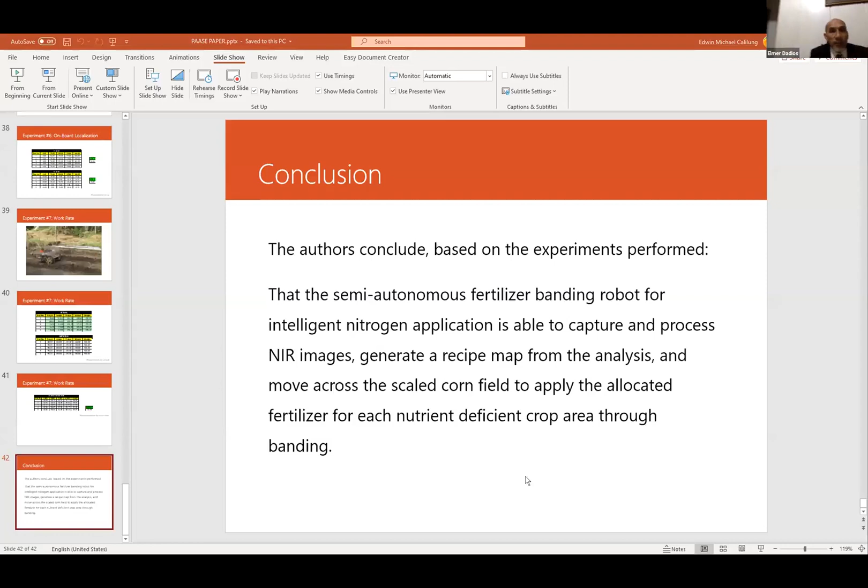Our next presenter is Dr. Ryan Rhay P. Vicerra. He's also the Vice Chair of the Manufacturing Engineering Department of the De La Salle University and a full professor of the Department of Manufacturing Engineering also, De La Salle University. He was the 2019 outstanding scientist, and in 2017 he was awarded also as the IEEE Asia and Pacific Outstanding Volunteer.

He's a professional electronics engineer, and he's very known on research. He published more than 85 Scopus Index papers. His expertise includes artificial intelligence, robotics, swarm intelligence, biomedical devices, control systems, electronic circuit design, and many. Ladies and gentlemen, I'm proud to present to you Dr. Ryan Rhay Vicerra. Rhay?

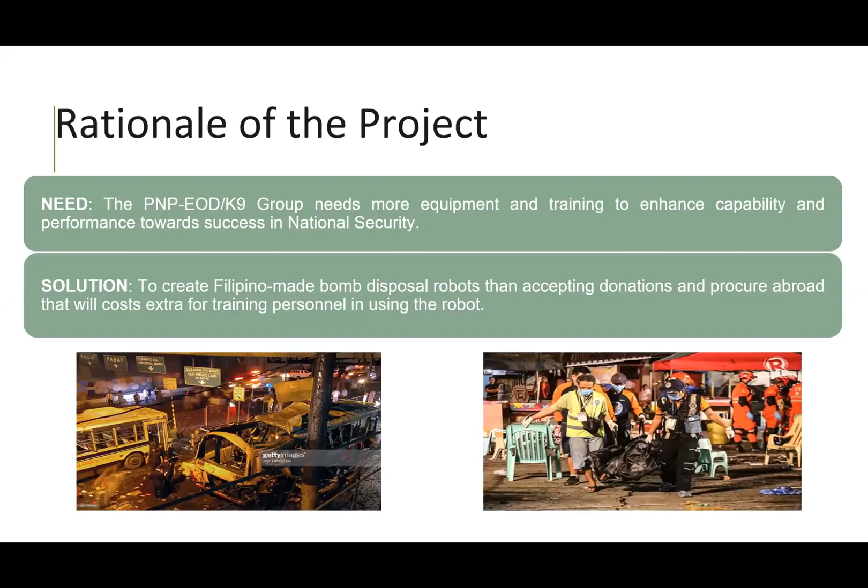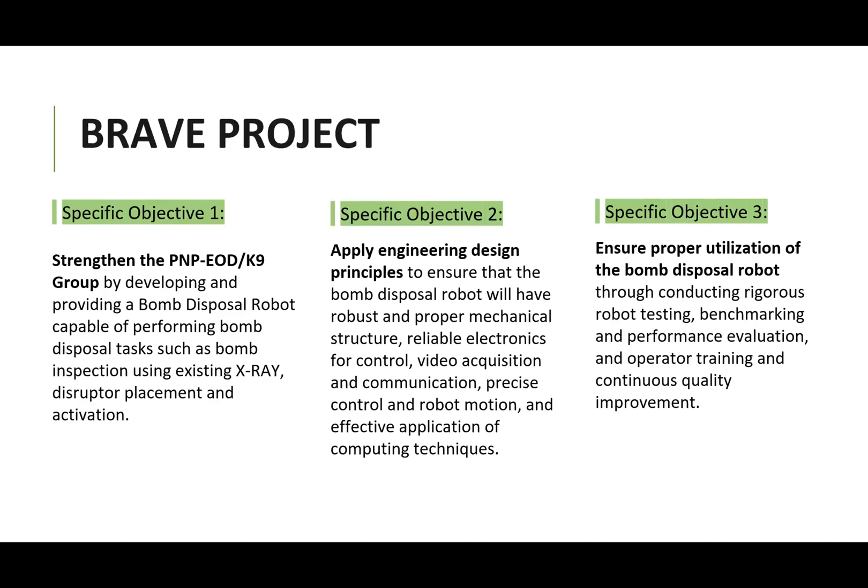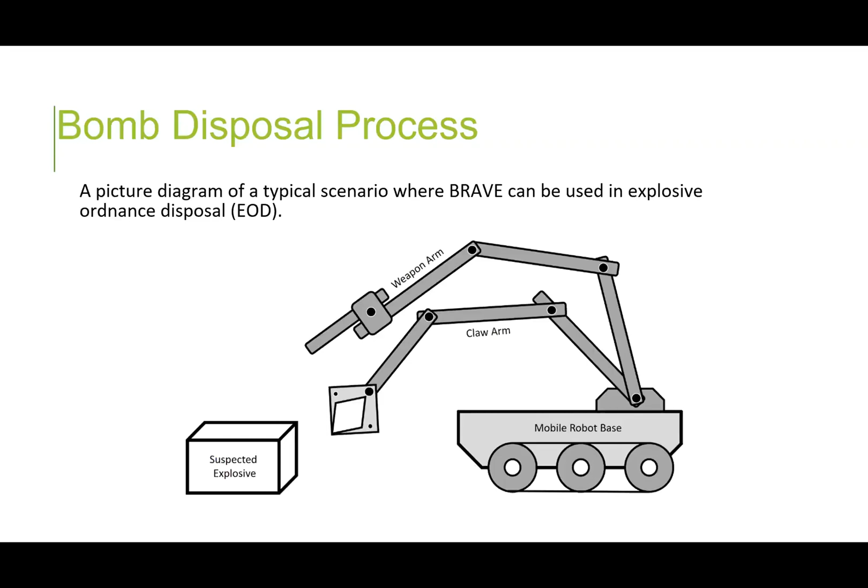So the bomb disposal process actually starts this way. Here's a picture of a typical scenario wherein the BRAVE or the bomb disposal robot will approach a suspected EOD or an explosive ordnance device. Of course, we still don't know what's inside, so it is still a suspected EOD. And in the presence of a suspected EOD, a human agent may be at risk if he or she will approach it. So the BRAVE will be the one who's going to approach and perform the EOD process as follows.

The first one is to inspect using a mobile X-ray unit. And then second is to identify if the explosive qualifies for water bomb disruption. Because there are some types of bomb that are not qualified for disruption, so another method must be performed.

So if it qualifies, then it will carefully place the water disruptor near the box or the suspected EOD. Then Brave will detonate the water bomb disruptor, making the suspected explosive device soaking wet so it will not detonate anymore. If a water disruptor is not enough, a high pressure water cannon may be used.

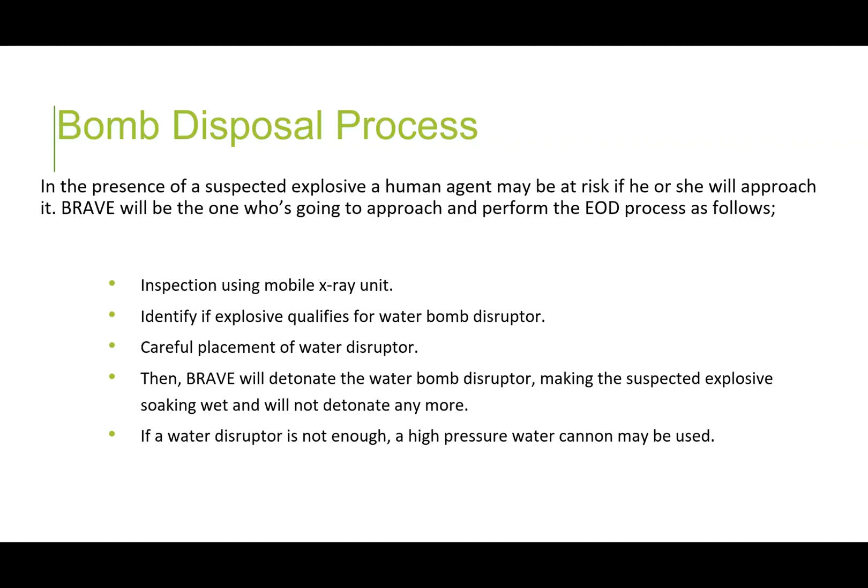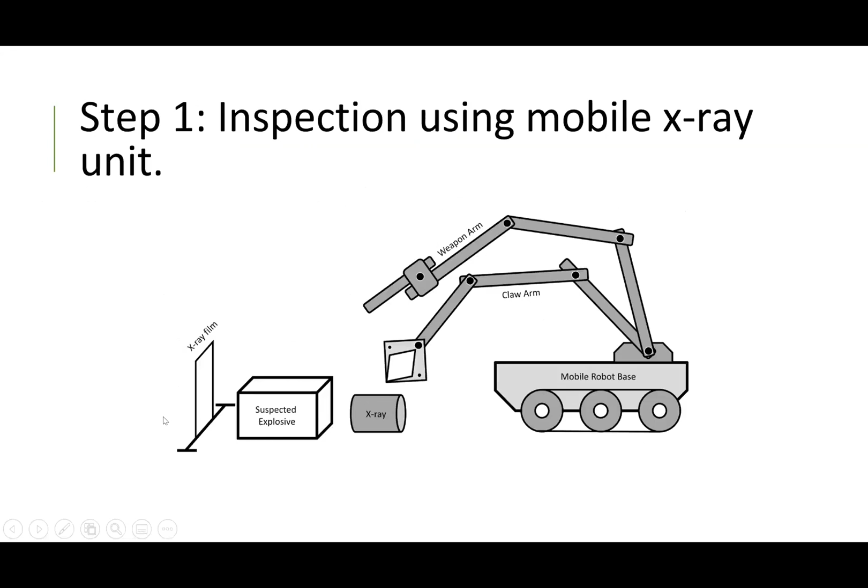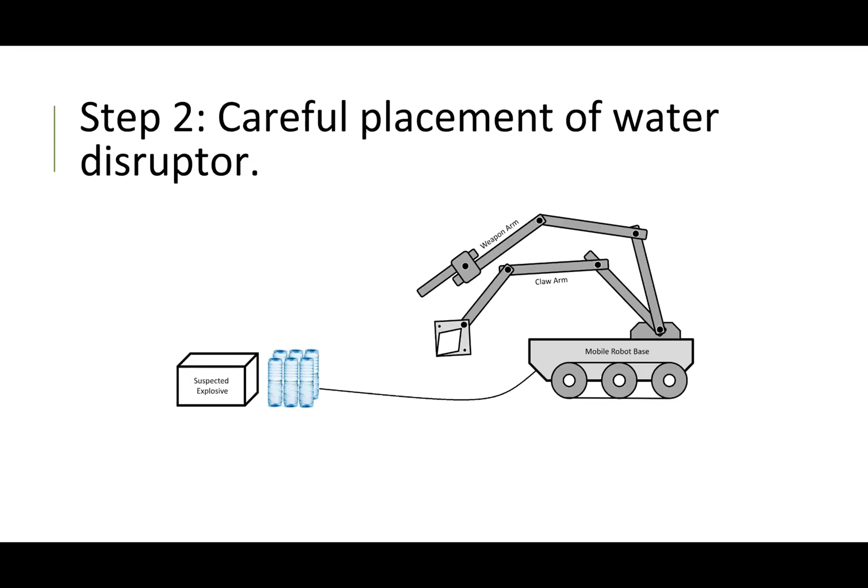So to illustrate this process, let me show you again a very simple illustration. The X-ray system is composed of the X-ray emitter and the X-ray film. This will be positioned by the Brave robot. After that, if it qualifies for bomb disruption, a bomb disruption module will be placed near the suspected explosive, and there's a tether connecting the robot and the disruptor. Remotely, it will disrupt the suspected EOD.

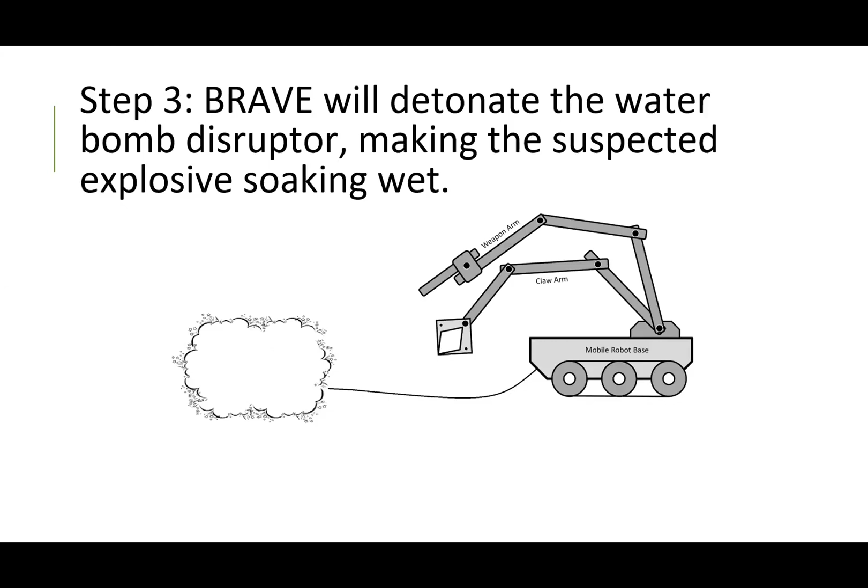This way, all the electronics and everything inside will be dismantled, and the bomb will no longer be operational. Okay, in the event that disruption is not possible, one way also is to use a high pressure water cannon. And that water cannon can be placed in one of the arms of the Brave robot.

As you can see in this illustration, the Brave robot is a mobile robot with two robotic arms. One we call the claw arm, obviously because it has a gripper as an end effector, and the weapon arm is an arm where we can connect the high-powered water cannon.

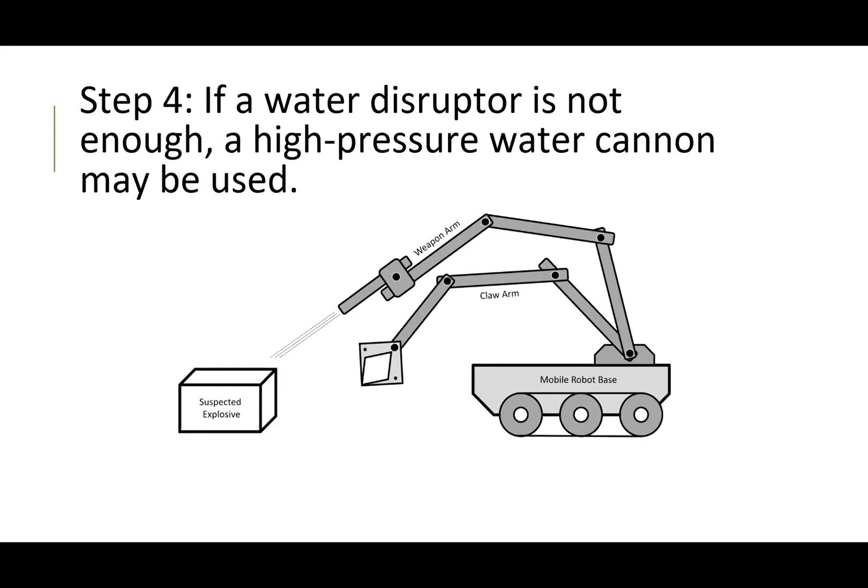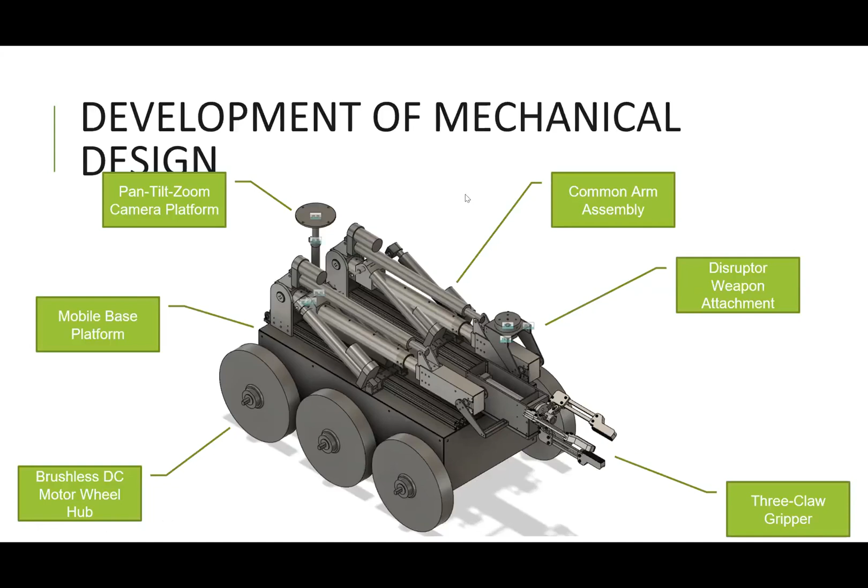For this design, what's illustrated here is a 3-claw gripper, the one that we presented in AUN, the one I mentioned a while ago, and I'll also be discussing a bit about that. Okay, so here's another rendered view of the Brave robot. And here's another version of it.

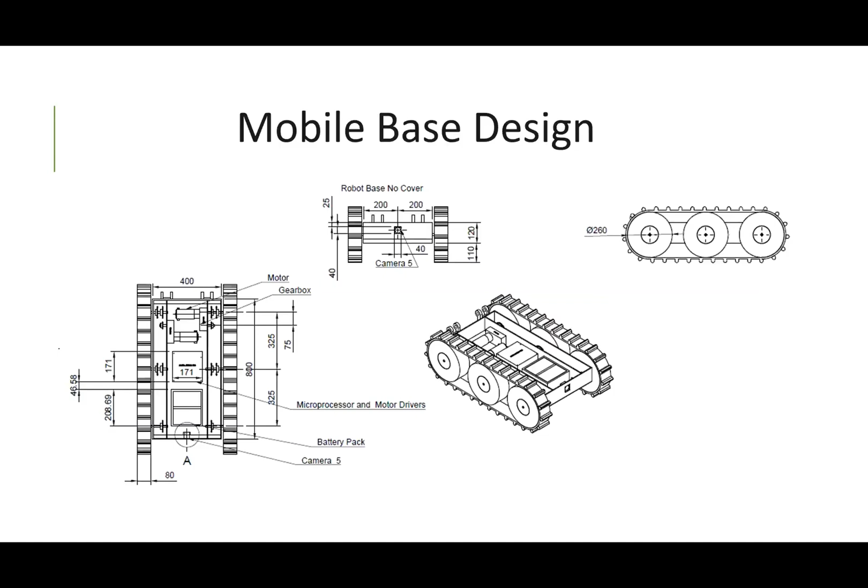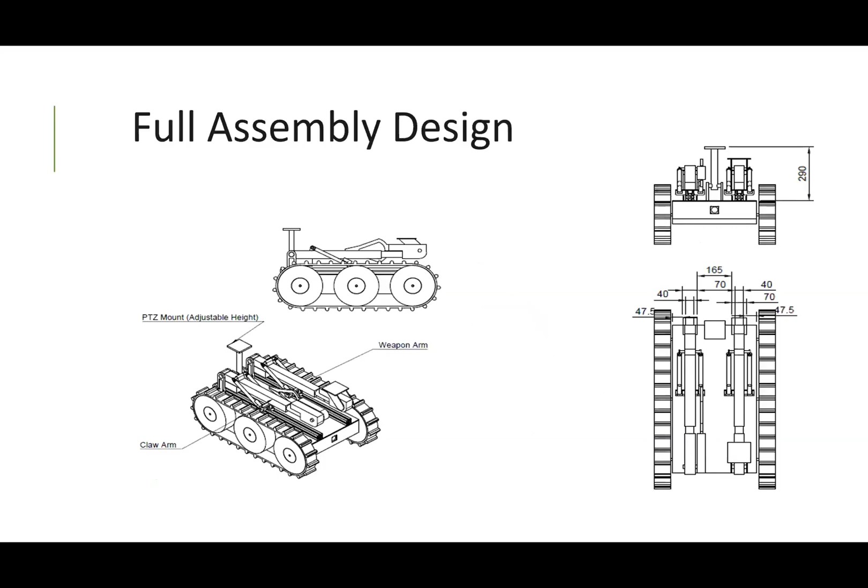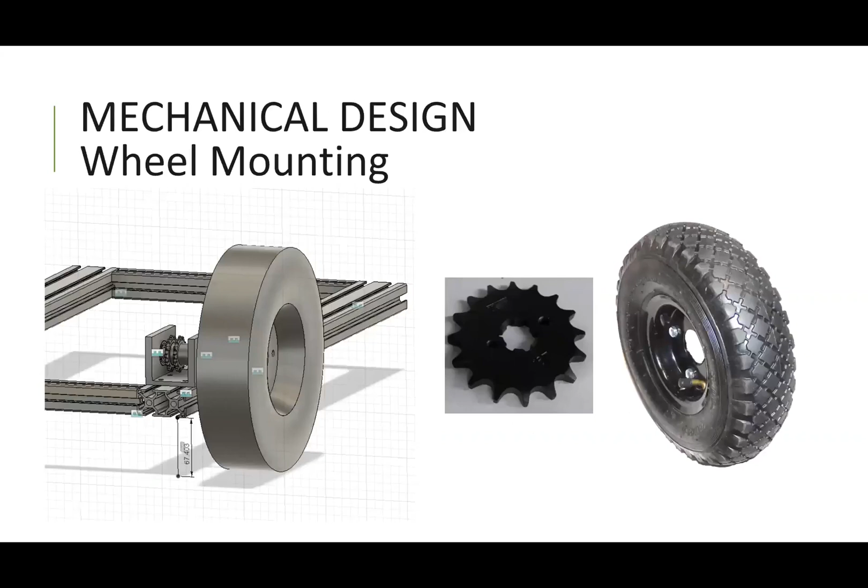So here are the specifications of the mechanical components of the mobile base. Again, I'll just be showing you some of the pictures of our Brave robot design. This is still one overview of the project. And here are the wheels. As for the motor, we use a brushless DC motor, similar to the one that we use in electric bikes.

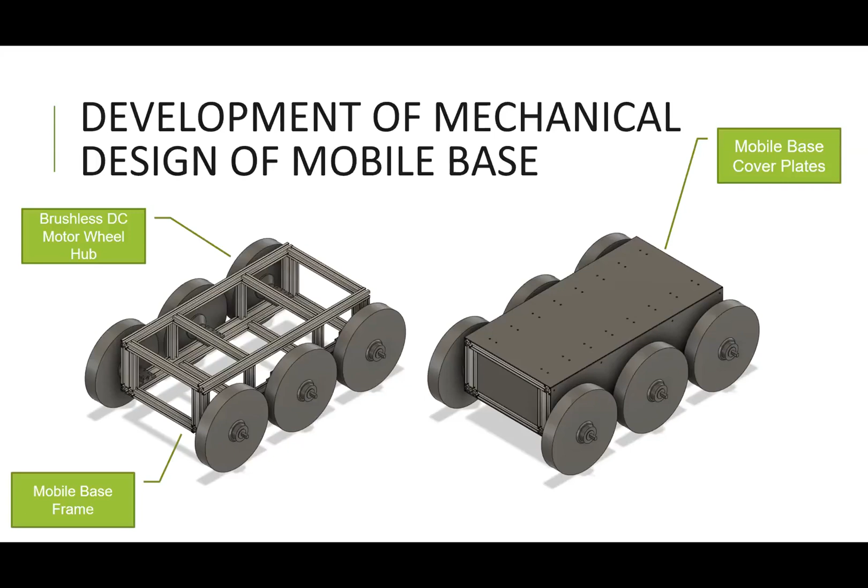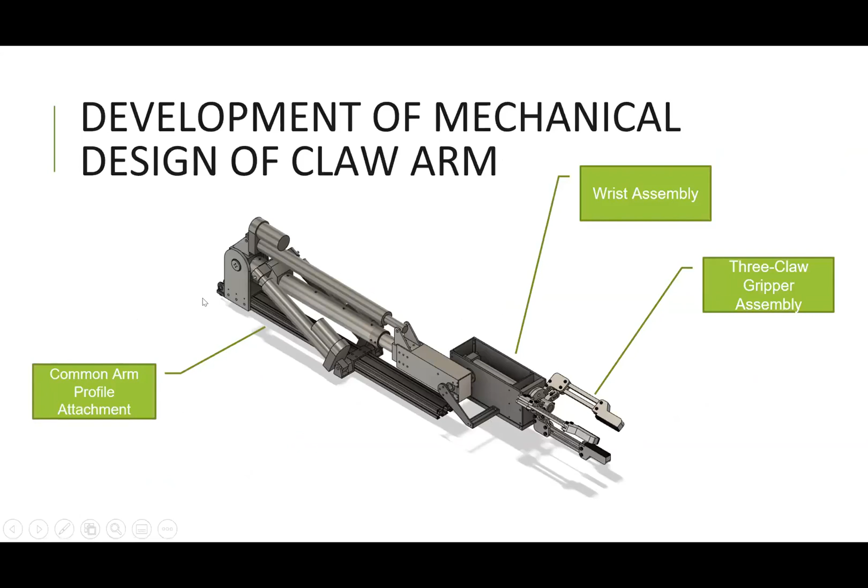Okay, and for the claw arm, we have the wrist assembly that will be connecting the claw arm to the whole assembly of the arm. And this is for the weapon arm. And this is the gripper that we developed that I shared with you a while ago.

This was actually in cooperation with some of our graduate students, namely Mr. Dino Ligutan, Mr. Jason Espanola, Richard Tanay, Dr. Argel Bandala, myself, and of course Elmer Dadios. The concept of this paper is to design a 3D-printed three-finger robotic gripper end effector.

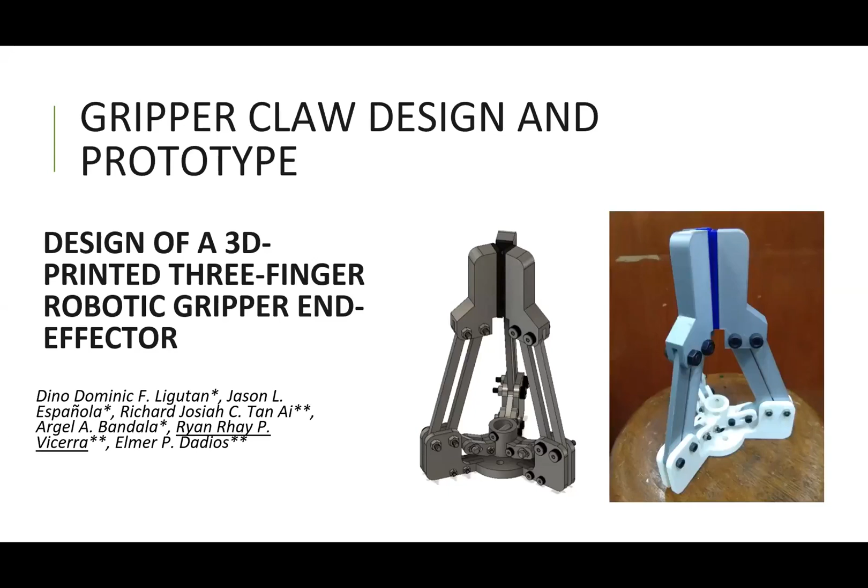So this is an illustration of it showing its dimensions, and these are the parts that we 3D printed, and we used Autodesk Fusion 360 for the CAD drawings and for designing the 3-finger gripper robot arm.

This 3-finger configuration is expected to improve gripping reliability and stability compared to a 2-finger design.

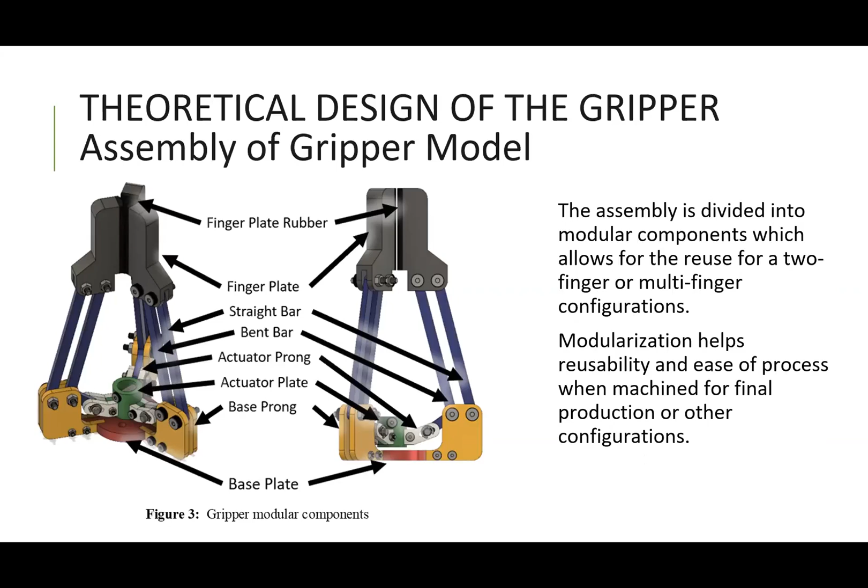The design is actuated by a linear actuator, with a dimension that allows at least a 30-centimeter opening. The assembly is divided into modular components, which allow reuse of the 2-finger or multi-finger configuration. We also applied modularization, which will help with reusability and ease of process when machining the final version of this design.

Here are some illustrations we shared during our presentation at that conference. At this point, I'd like to share the progress of our metalwork fabrication. By the end of this series of pictures, you'll see that the Brave project has already taken its mechanical form, or mechanical frame.

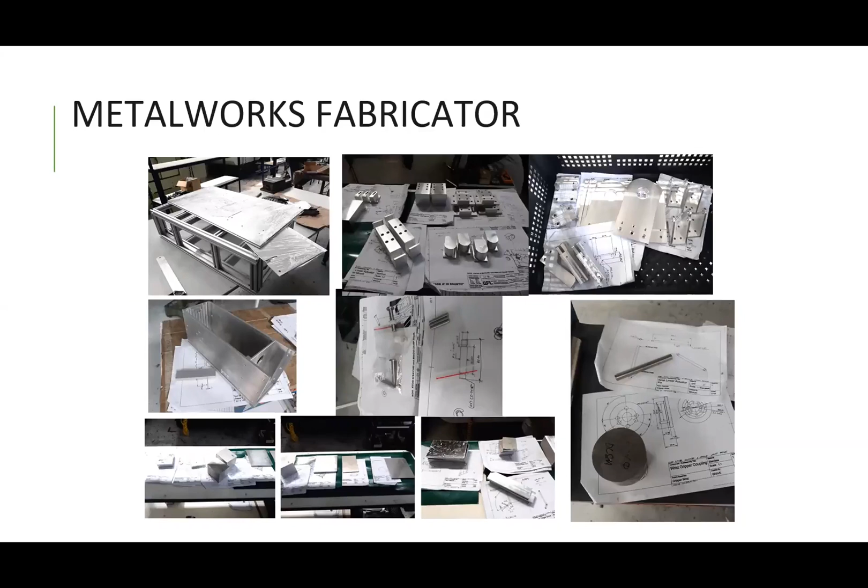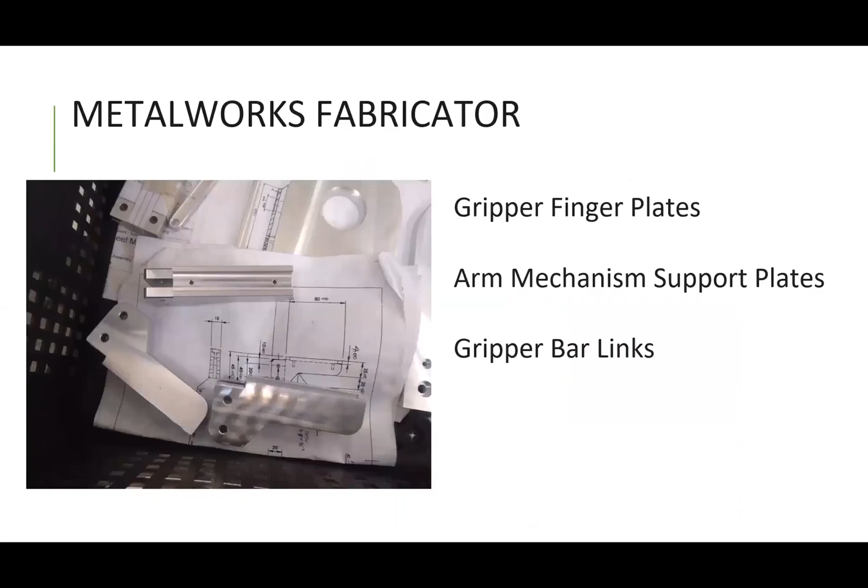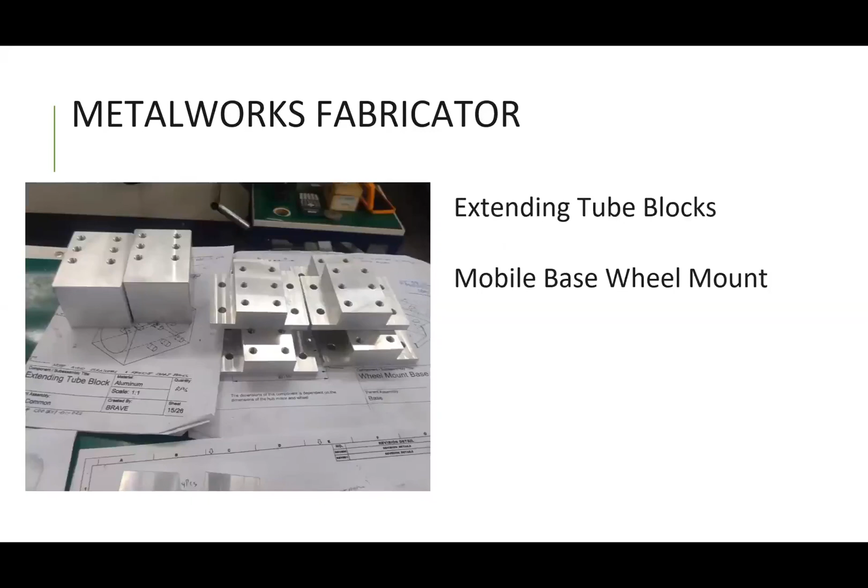This is the mobile aluminum frame, and these are the gripper finger plates, arm mechanism support plates, and gripper bar links. We also have these bushings, linear actuator caps, extending tube blocks, mobile base wheel mount, and this joint for the linear actuator attachment to the aluminum profile base.

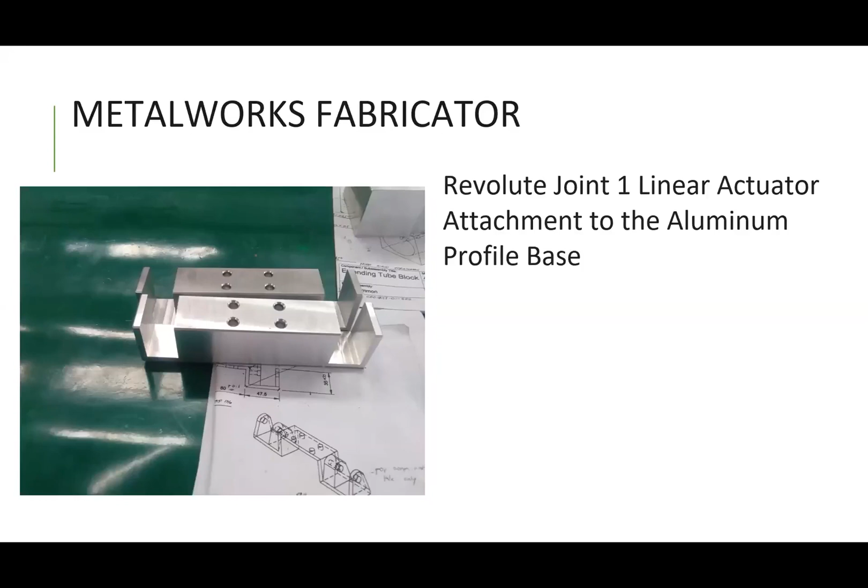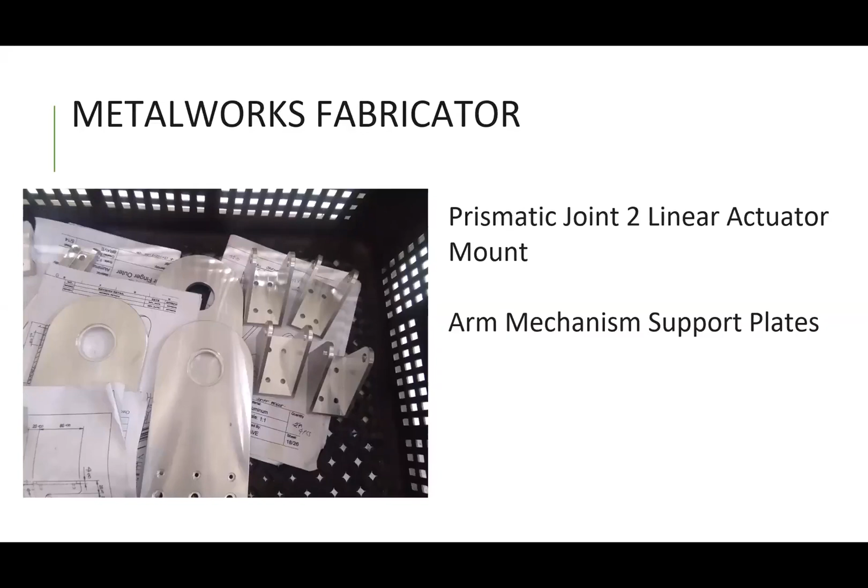And then we have the linear actuator mount for the arm mechanism, and also the arm mechanism support plates. This is the wrist assembly.

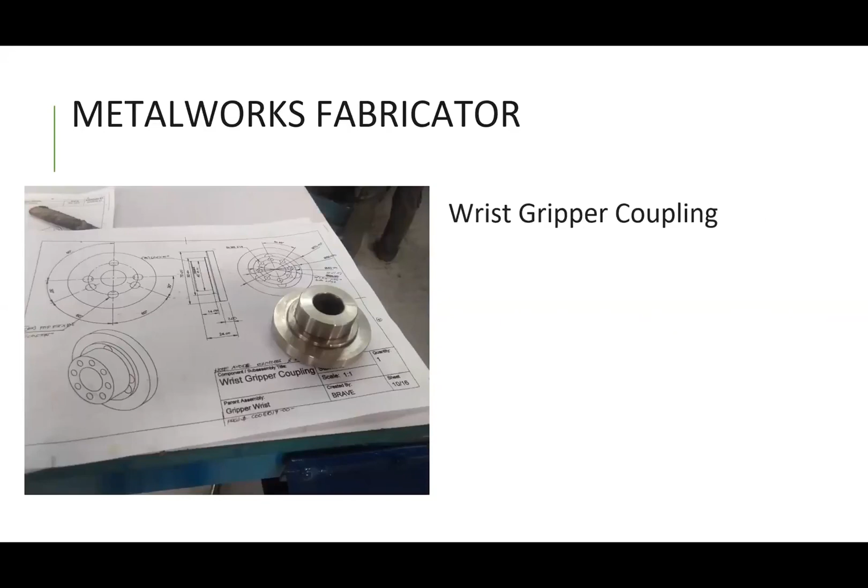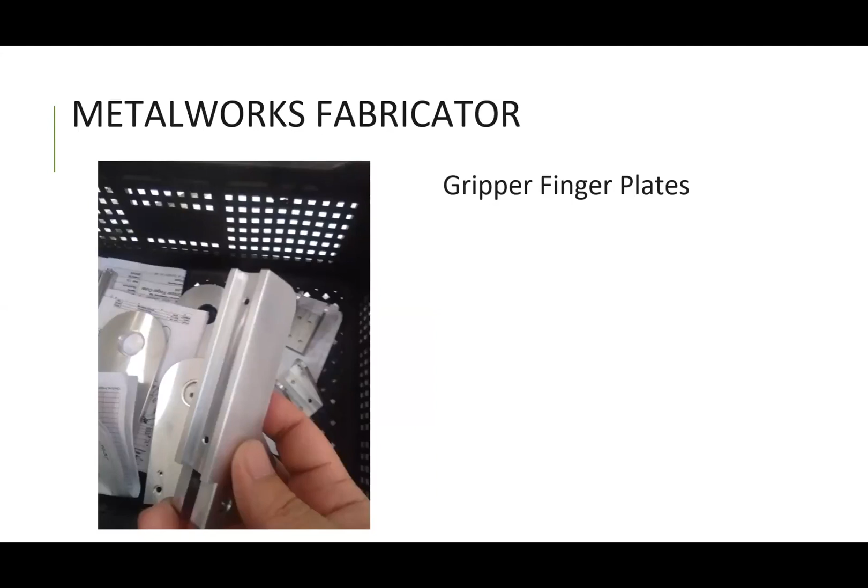These are still some of the mechanical parts. This is one of the final versions of one finger of the 3-finger gripper.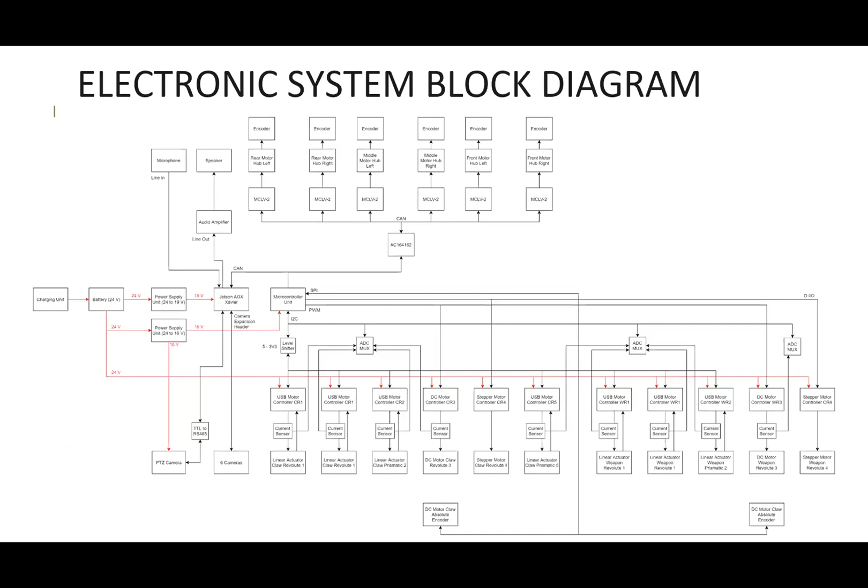This slide discusses the electronic system block diagram of the Brave robot, which was already discussed a while ago. This is the electronic system block diagram of the system.

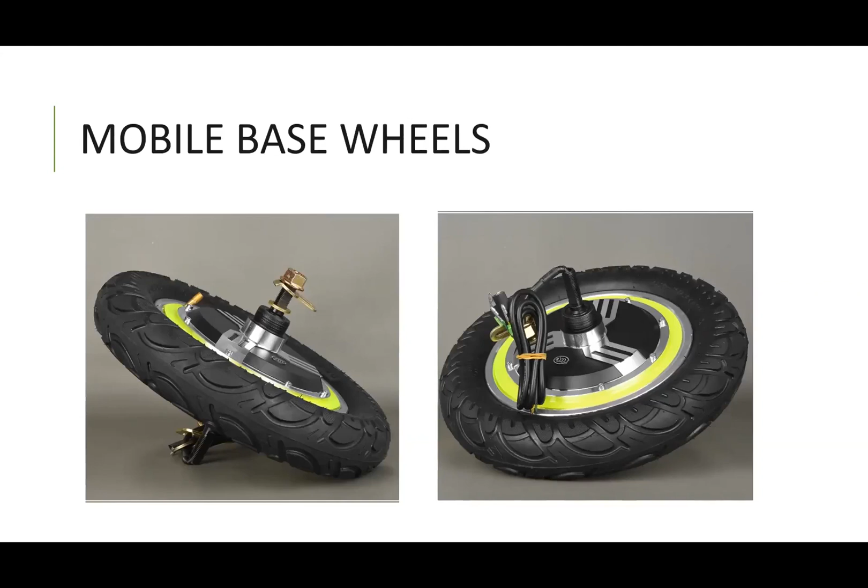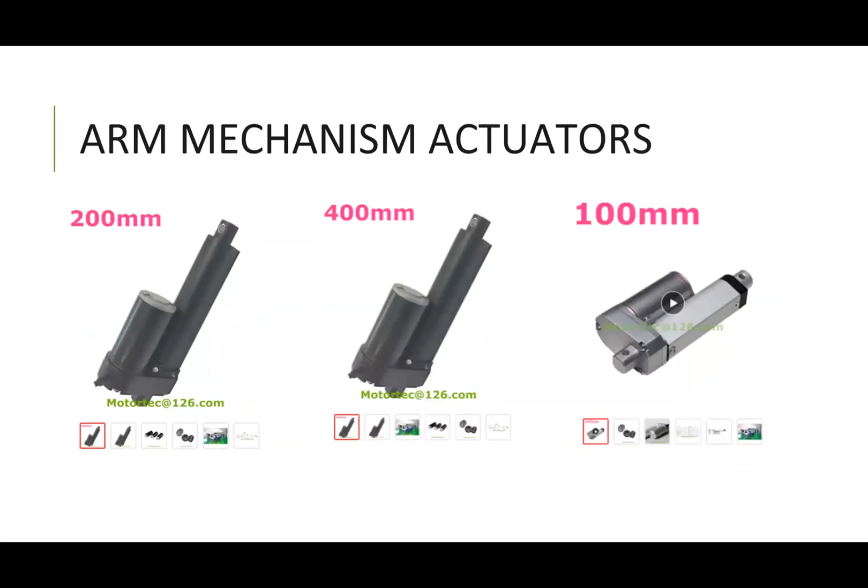This is the wheels that we will use, an aftermarket system typically used in electronic bikes. And of course, some of the electronic components that we will be using, including some available in the market, for the electronic system.

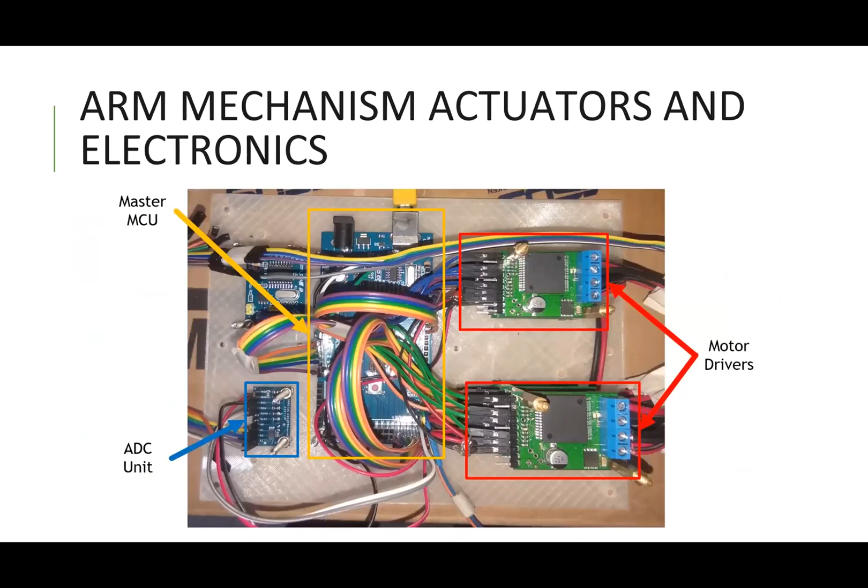This is an illustration during our testing in the laboratory, and this is the 3D printed prototype of the whole weapon arm. As you can see, there's also the 3D printed version of the 3-finger gripper, the wrist box, and the linear actuators.

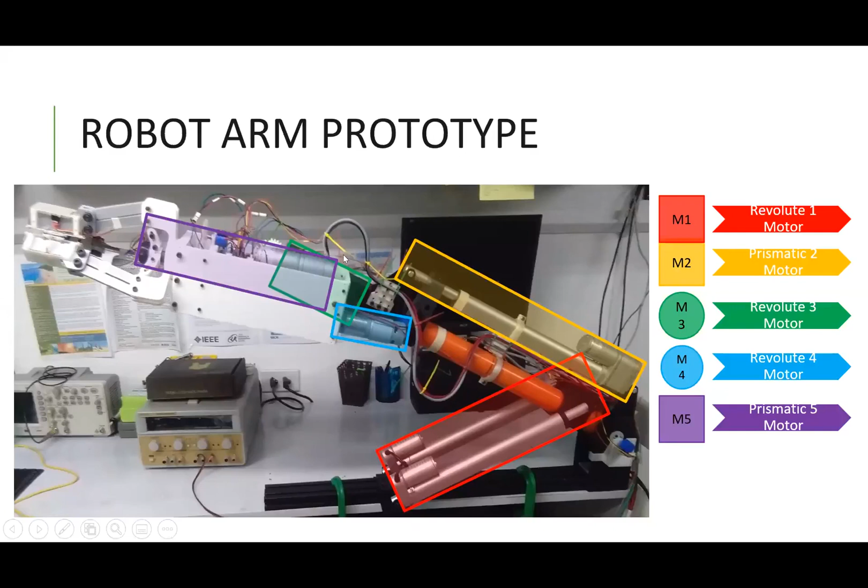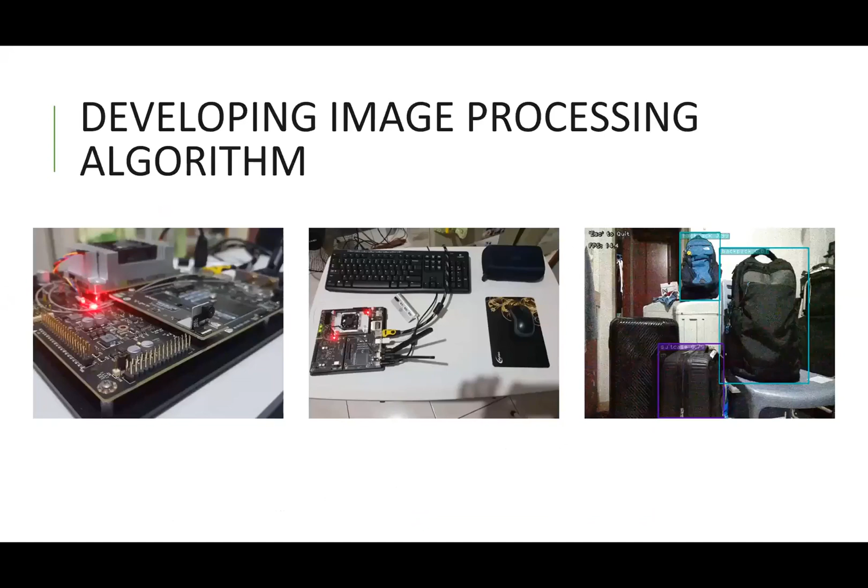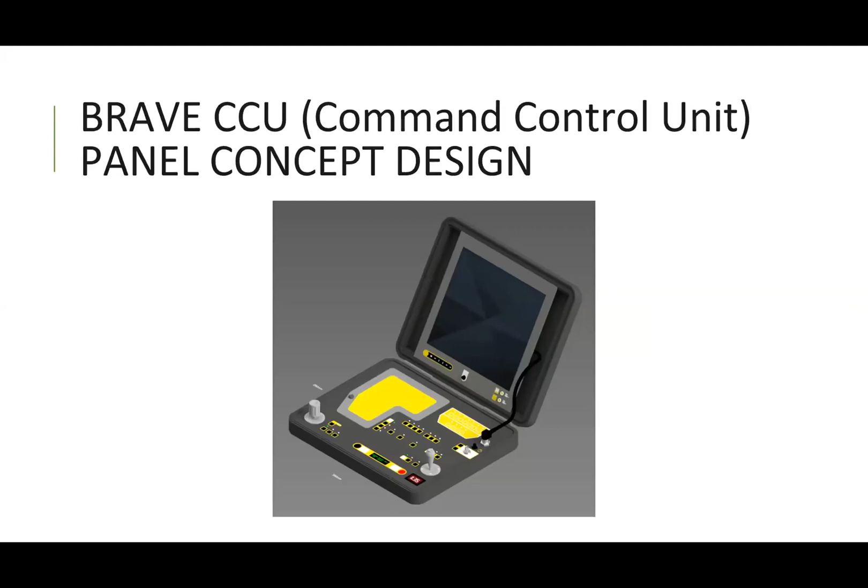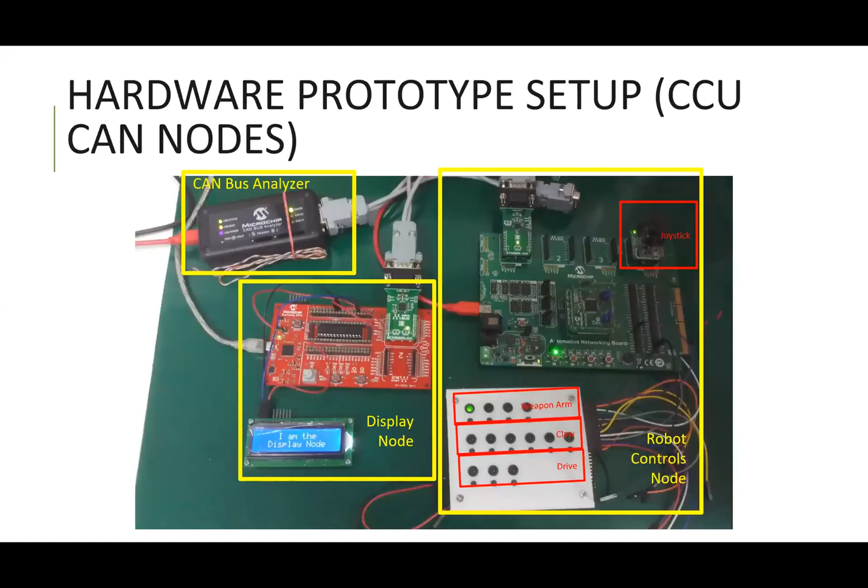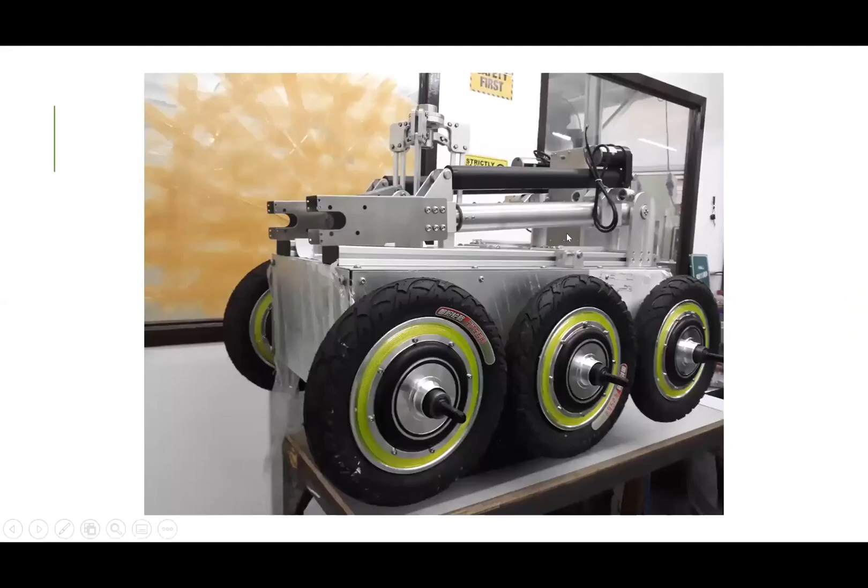You can see the two arms, the weapon arm and the claw arm. Of course, the module for the arm and the attachments are not yet installed in this photo.

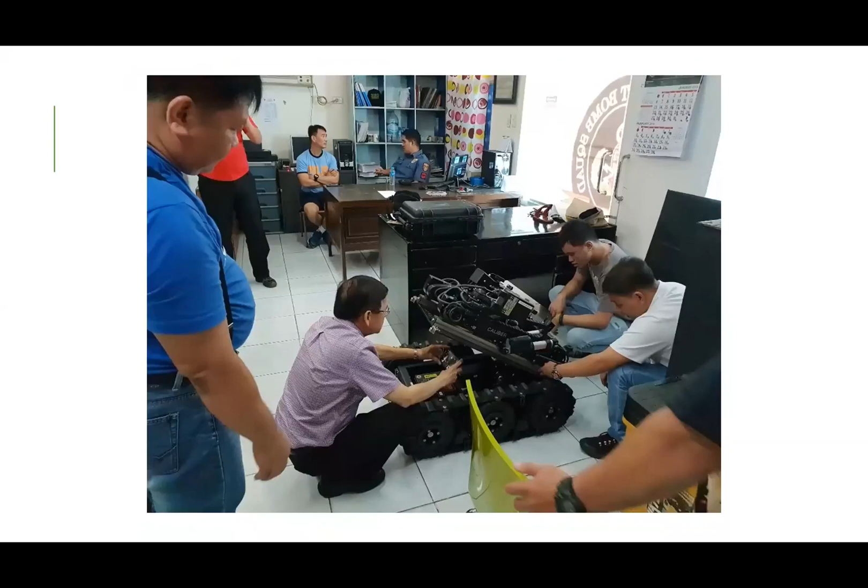This is some pictures of our team collaborating with the PNP EOD group. They are inspecting market-available bomb disposal robots from abroad. The PNP EOD group received a donation of this ICOR robot, and this is actually the benchmark for our Brave robot.

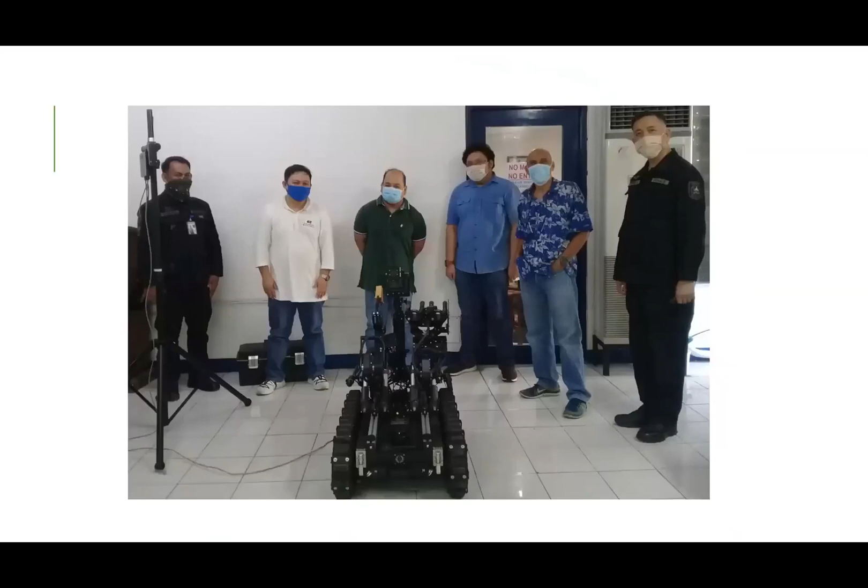This is a photo of our team. In this event, we were able to see the process of how to dispose of or disrupt a bomb. This is another photo of our team, taken recently, so you can see all of them wearing masks.